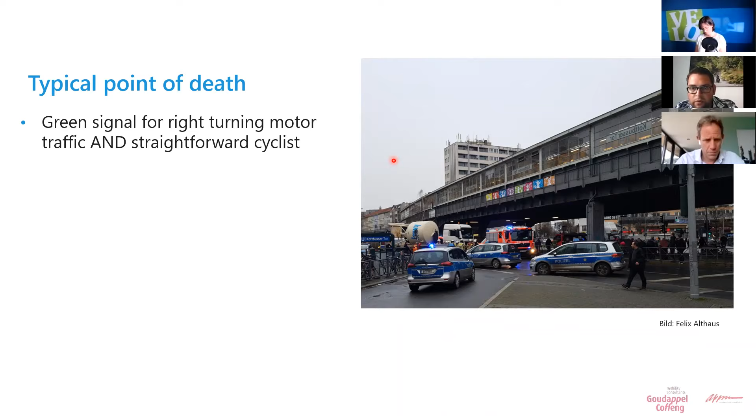You see it, the conflict zone is the turning motor traffic wants to go right, and the pedestrians and cyclists want to go straight forward. And it's not only a built-in conflict zone, it's actually a typical point of death. So the typical situation is that the motor traffic turns right, and cyclists and pedestrians go straight forward, and many people have been killed in Germany, and it still continues.

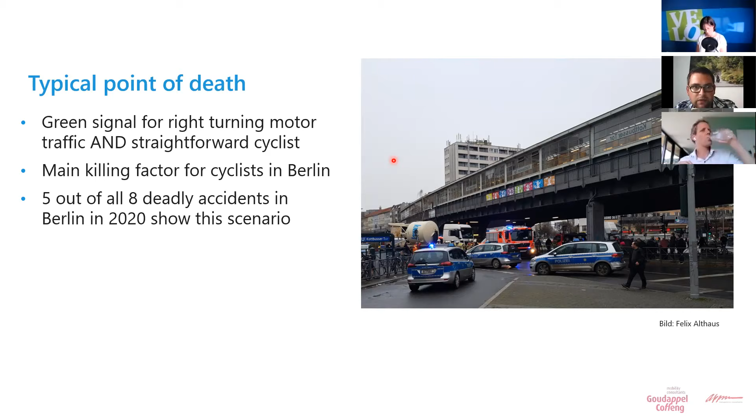It's the main killing factor for cyclists in Berlin. Here is written 8, but we had a deadly accident yesterday, so we are at number 9 now. So 5 out of 9 deadly accidents in Berlin in 2020 show this scenario. And as well, pedestrians regularly get killed via this scenario.

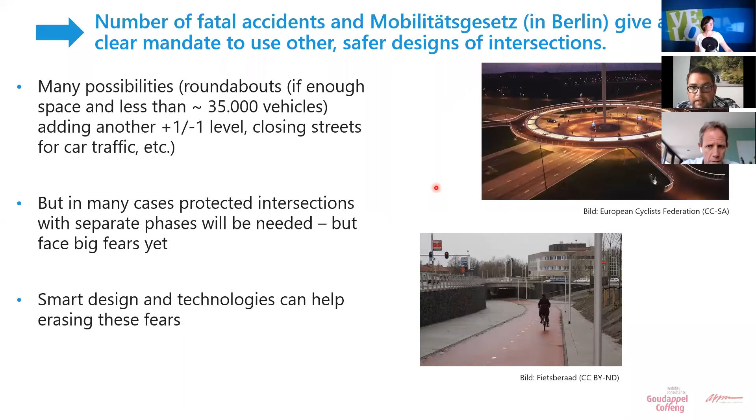But there are many spots where you cannot do this, and where you would need to use a regular intersection. And in my opinion, right now the best design for these intersections are the Dutch protected intersections with separate phases that minimize the conflicts very well. But still, they face big fears in Germany, for example, because of the long waiting time. And in my opinion, smart design and smart technologies can help erasing these fears.

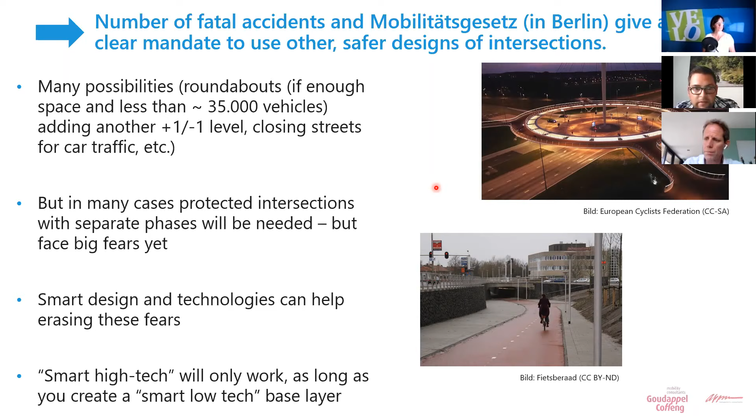But as well, on the other hand, smart high-tech will only work as long as you create a smart low-tech base layer. So now we will have a look at these low-tech and high-tech layers, and after that we will get into discussion with Rico. So let's have a look at the low-tech elements of protected intersections. I will move this window away so that I see everything.

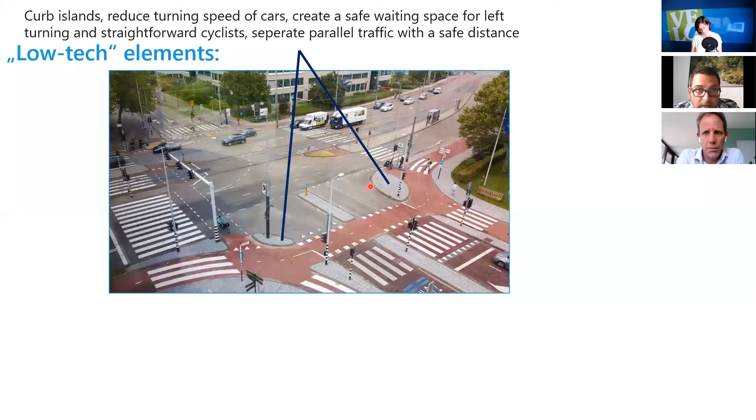So the next element is the stop bar for the cyclists, which is placed far into the intersection. So here, as far as possible, it is placed into the intersection, which means that you have a very short crossing area for the cyclist. Only this distance needs to be signalized with traffic lights, which makes the clearing time little, and raises the capacity of the intersection.

And if you compare it, for example, if you would place the stop bar here in front of the pedestrians, and here, you would have a way longer crossing time, and everyone would need to wait way longer at this intersection. So that's why the Dutch use zebras here and not traffic lights to sort the pedestrian cycling crossing.

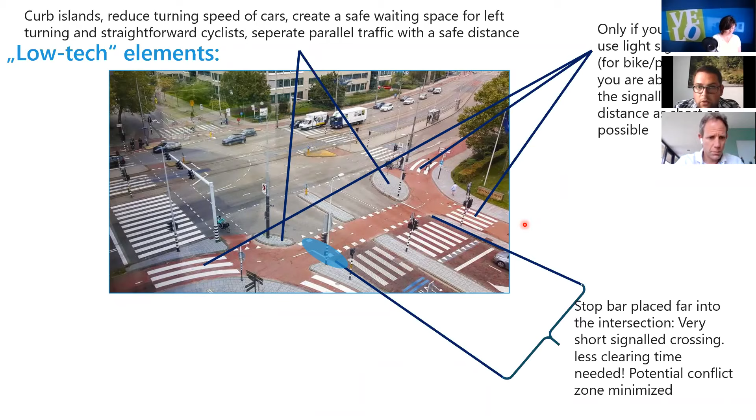So let's continue. Right, as I said, you have the zebras here, and I think it's quite fair to give pedestrians priority ahead of cyclists because they are the most vulnerable participants of traffic. So I think it's best giving them priority. And as well, if you use the zebra there, which is quite clever, you can have green light in this direction and green light in this direction. So you are more flexible in whom you give green light, so you can move more people at the same time, which is smart, I think, as well, but smart low-tech.

And what you see here is definitely needed to do better in Germany if we adapt this design. So if pedestrians want to cross here, they need at least 2 meters space here. For example, people with a Kinderwagen or with a wheelchair. I think in Germany it wouldn't be acceptable to build it like this. As well, it's not allowed. You would need at least 2 meters to have a zebra here and then a traffic light here. So not everything in the Netherlands is perfect, and we are now in the situation in Germany that we could learn and do things better here.

So let's continue. We have as well the free right turn for cyclists, which is clever as well. In Germany, usually cyclists who turn right need to wait, and with this design, they always can turn here freely and as well here. And then you have separate traffic light phases, which eliminate the right turning conflict to 100%. And completely for everyone, not only for cyclists, not only for pedestrians, but for everyone. So it's a quite safe design.

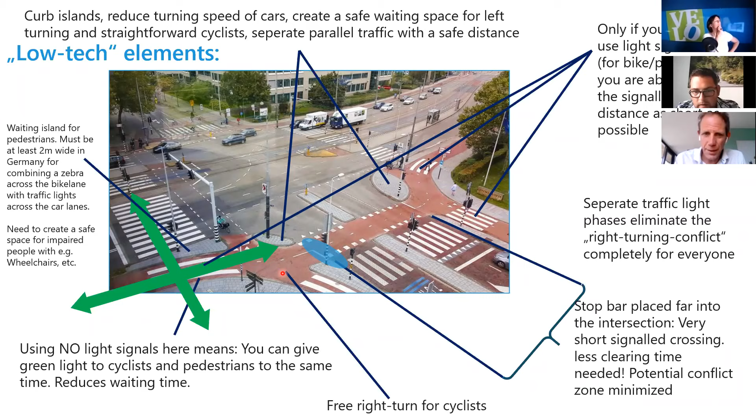Yeah. On the next slide, you can slide forward. Yeah, please. And maybe it's good to start a little higher scale level than the intersection itself, because most of the smartness is not in the intersection, but is in the network planning, which has been done before. So if you really want a smart, intelligent intersection and a way to organize your traffic, you should start at a network level.

So there are some steps you could do, and the first one is, well, start taking active modes seriously. So move from cars to start with walking and cycling, or maybe in German, Laufen und Fahrradfahren. And if you start taking these active modes seriously, both on a network level and on intersection level, it will be much easier to organize your traffic system. Not easy in a way that you have less problems in your design, but that there are better solutions to find.

The next step is optimize your car network. Not every road should be a main road. Make choices in the network planning. So make a lot of roads with low traffic volumes for cars and buses. Make them 30 kilometers per hour zones. So the number of cars will drop even more, and you don't need traffic lights at all. And sometimes it's possible to have, for example, 3-arm intersections, which are much easier to organize than 4-arm intersections.

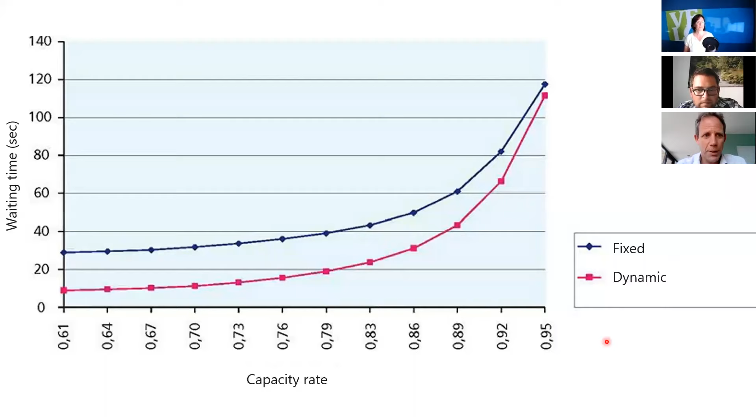Just start. There's always a first step, and it could be one. There's no need to have a lot of them at the moment. But what you normally see is that the intersections are connected with each other, especially to optimize the car traffic. And if you pull one out to make it in a different way, then you'll have to do a lot of changing. So it might be easier to take a whole string of intersections and start rebuilding them one by one. Yeah. So it should be a domino effect then. Yeah. Okay.

I think Hille, you mentioned that someone said this bike lane in the middle of cars is just a matter of comfort, not safety. And even if it was just a matter of comfort, basically it's as well about safety. If people don't feel comfortable, they won't cycle there. So already this means you need another design, because you need a design that makes people feel comfortable. Otherwise, they won't use the bike.

And then I would say we continue a bit with the discussion of Rico. I wanted to know from Rico which experiences the Dutch made in about the last 10 years, what we can learn in Germany, and what we could do better now in Germany taking that knowledge into account. Yeah, thank you, Jens. I put that in another slide, which is the next one.

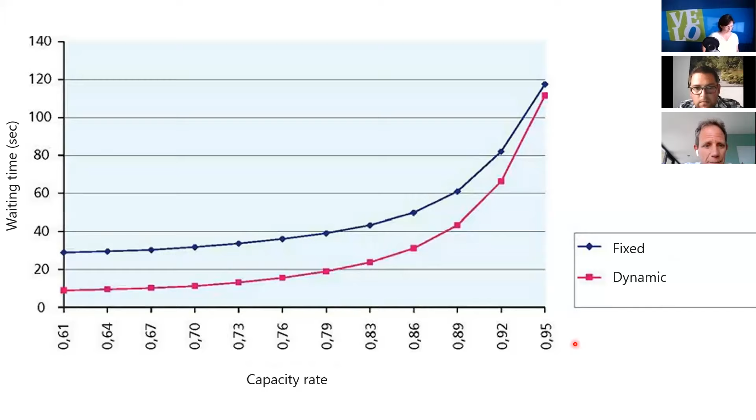There are three things that were the main topics in the Netherlands for the last maybe 10 years. One is quite a general one, but it fits very well in this discussion: to have less car-oriented cities. So in the city, and maybe in everything that was built before, let's say 1950, we try to orient that more on cycling, walking, and public transport, and less on car traffic. And to be honest, in the rest of the cities and on the highway network, we provided more car capacity, so that you keep the balance a little bit and still have car capacity and car accessibility. But in the inner cities, the change was really huge the last 10 years to orient that more on cycling and walking.

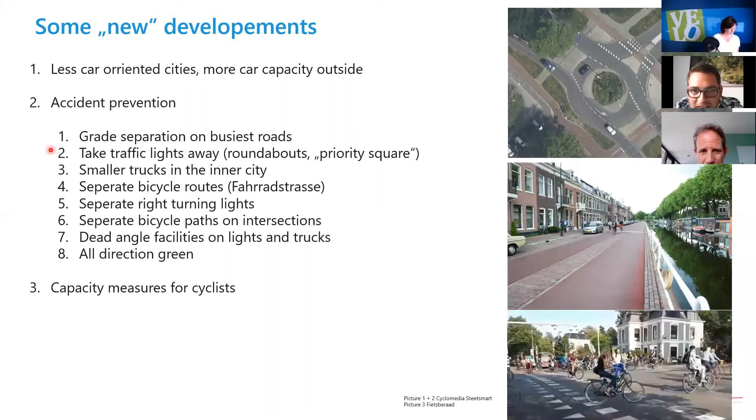Okay. Yeah, I have a small slide for that, or maybe two. Yeah, try to find it. The next one is about this detection. How could you do it? So there are some ways: detection loops or mats or push buttons at least. And you could use, for example, video or radar with heat, or you could use apps to detect cyclists and pedestrians.

But also in the Netherlands, we still have those buttons. And well, with cycling and buttons, it works quite good because you can use this pole on which the button is put to hold yourself, and it's quite comfortable. So I would really miss those buttons if they weren't there anymore. And for pedestrians, well, there's maybe one big reason why those buttons are acceptable in the Netherlands. This is on the next slide.

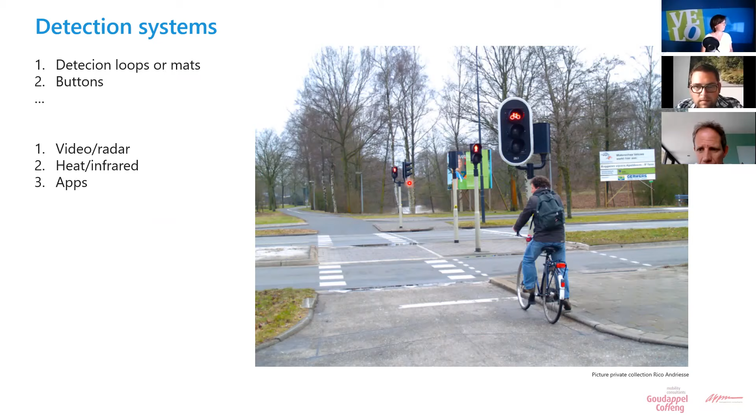And the easy answer is that, well, as long as you make sure that the green light will appear when you push this button, then it's quite a good solution, and it's not bad to push the button. If you push the button and have to wait again for 2 or 3 minutes, well, then you won't be happy about the button. But actually, it is not about the button. It's about the green lights and the red light you are waiting for. So it's about waiting time.

Yeah, actually, there was a book published 2 weeks ago in the Netherlands, which was also in this discussion. Isn't it strange that you have to push a button if you're a pedestrian? Why don't we make push buttons for car traffic also? So maybe the discussion is coming.

Okay, and Hille announced that she has some questions. Yep. Actually, I have an interesting note from somebody from outside. Somebody mentioned that in Marburg there exists an app called C-Bike for cyclists to have the green wave. I've never heard of that before. You might be interested. I'm asking for the link so I can share it with you afterwards. But Marburg, the C-Bike app.

Oh, that's nice. Yeah. And then I have a question, but it just leads to another discussion. So I don't know if you want to go on further here, or if I can post it right now. Maybe if it leads to another discussion, not now, because we have about 7 minutes left. Okay. Is there something very important you still want to mention, Rico? Because we also have a surprise for Berlin, which we will announce at the end, and we should leave about 5 minutes for that, I guess.

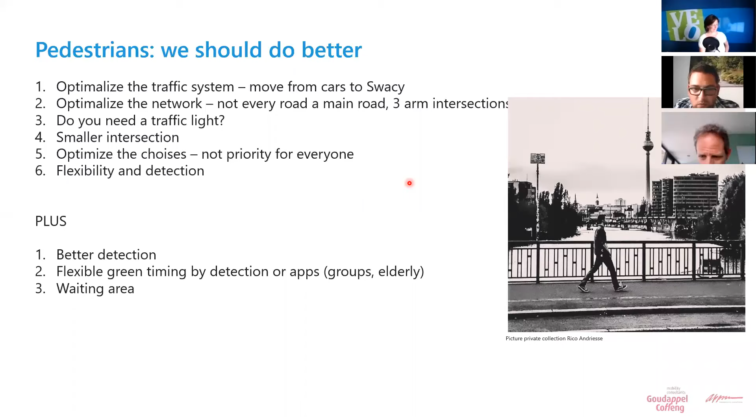Okay. And yeah, now we have a little surprise for Berlin. Actually, Goudappel Coffeng, and oh yeah, we have lots to show here, but we don't have much time left. Goudappel Coffeng and APPM offer a free replanning of one of 4 deadly intersections where we had a deadly accident with a truck or a bus turning right and a cyclist, and we offer to replan it for free. Of course, we cannot build it, but we can show how the Dutch would do so. And there are 4 of them.

One is in Friedrichshain, where we had recently a deadly accident with a turning truck: Petersburger Straße, Ecke Mühsamstraße. And then there's one in Adlershof, Hermann-Dorner-Allee, Ecke Eisenhutweg, where we had in 2018 a deadly accident. And number C is Mariendorfer Damm, Alt-Mariendorf.

Actually, it was not a turning truck, but it was a truck who just ran over or passed a cyclist too narrow. It is in Tempelhof-Schöneberg in the south. And number D is Groß-Berliner Damm, Pilotenstraße. I think it is as well in Niederschöneweide, where we had in the beginning of this year this deadly traffic accident with a turning bus and the cyclist.

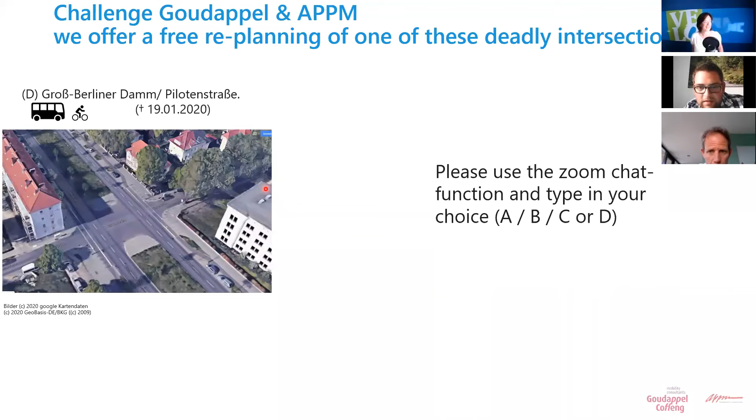Yes. More in general, the discussion on tactical urbanism and on making streets more nice places for people. I think those questions can be done very well when thinking about the network and about what city do I want to be. Do I always want to provide with capacity for cars on all roads in all areas? Do I want 50 kilometers per hour everywhere? And on these discussions, this fits very well.

I think as soon as you have decided that an intersection has an important role in the traffic network, either for buses or for cars, then you come back to the technical part, and then it's quite a question of organizing. But in maybe 60–70% of the city, you could do completely other things without ever mentioning traffic lights, detection, or whatever technical solution we come up with today. But it's a matter of choosing, and that's what they did in Barcelona also.